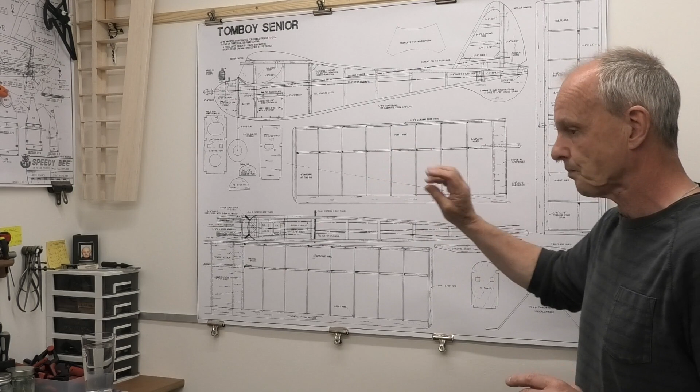Now these great set of plans by David Boddington were downloaded from the Outerzone website, and I said that they were published in Model Flying, and also along with that there was a great article by David Boddington outlining the build of this plane. It doesn't give you everything you need, but it gives you quite a lot of information that helps you through the process.

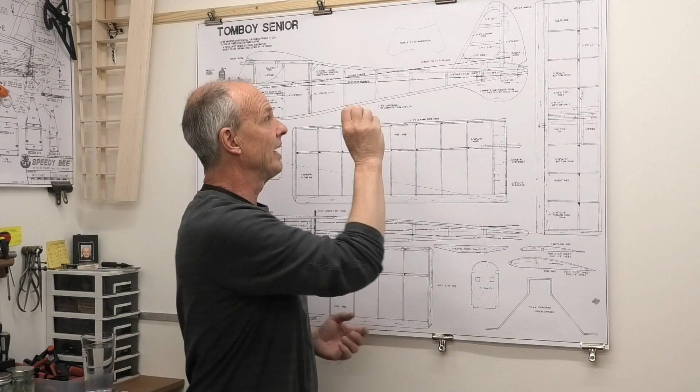And information like saying that actually this is quite a tail heavy plane, so you have to think very carefully about not making that tail even heavier during the construction, and actually thinking about how you're going to get weight up there in the nose. And that'll be important knowledge when we come to fit the radio gear. And what we'll do, as we've done with other builds, is just check before we put the radio gear in to see where that natural CG is, to make sure that if necessary, which is probably going to be the case, we need to put everything way up front.

Now I think one of the things I'm going to do first is build the wings and the tailplane, probably the rudder as well, and then I'll do the fuselage. I quite often build the fuselage first, but with this it just seems to lend itself to having the wings done first. And well, maybe you can build the fuselage first, but that's the order I'm going to do it in.

Now there's a few issues with the plans, or not issues, but things we need to be aware of, I suppose. Like the rib spacing and the wing length is a little bit out, so when we build the wings I will probably be setting it out just on a building board, not on top of the plans, because at the end of the day, if we've got the ribs and we've got all the trailing and leading edge and spars prepared, we can measure it and set it out. The plans don't really add a great deal.

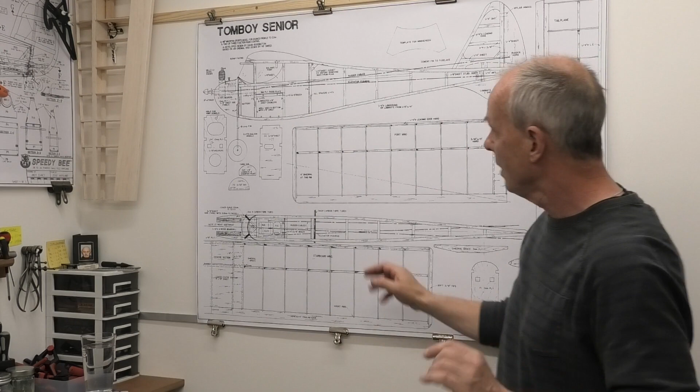The cross formers, hopefully you can see, I apologise if you can't, but the cross formers 1, 2, 3 are shown, so they've got the firewall and then these formers. It's worth noting though that there are 2 F4 formers, and actually this one here is really F2. It's just been labelled wrong.

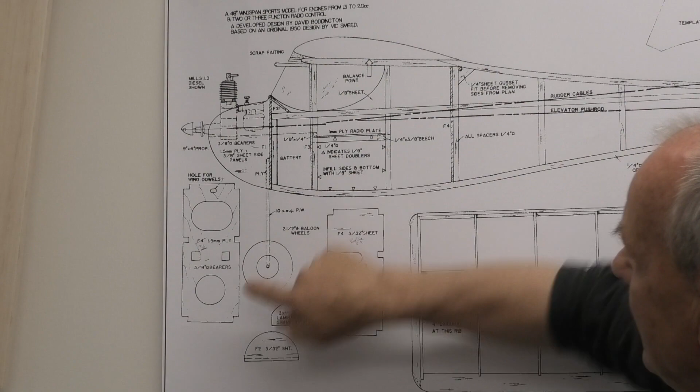At the front here you can see that the battery is indicated in this area. Now I'm not sure how you're going to get the battery into there, if that's what you need to do to get the CG right, because the former, which is actually F3 but labelled F4 here, only has these really small holes in it, and I don't think that's going to be big enough to get a battery into this space. So we need to be mindful of how we're going to do that.

We could put a hatch underneath. There's no reason why we can't, and if we need weight at the front, the added weight from building that hatch is going to benefit us really. So that's what we need to be mindful of as well.

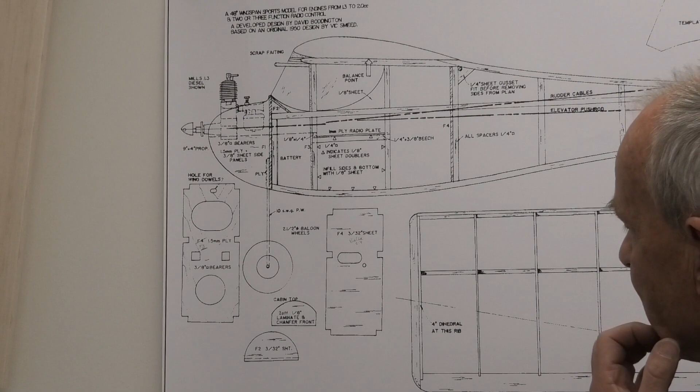Now if we look at the tail, we're going to need to think about how this rudder under here is secured, as well as the fin. The plans don't show any sheeting on the bottom side of the fuselage or the top, but clearly we're going to need to have something if we want to have those secure. So that's something that we'll need to deal with when we come to building this section.

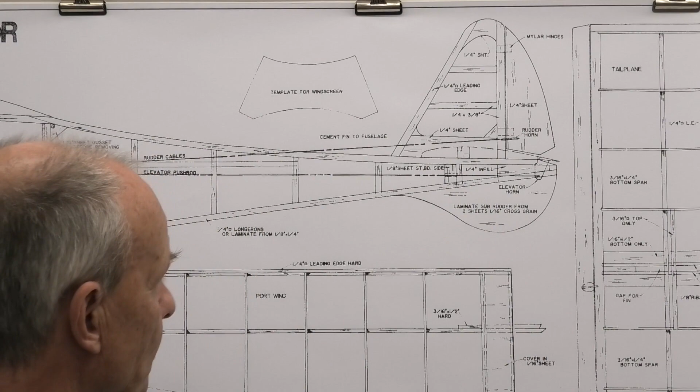Now, as with all plan builds, there's going to be lots of head scratching, lots of thinking, things we have to interpret ourselves, and the golden rule, as I always say, don't trust the plans, don't trust the measurements.

So when I build the fuselage, I'm going to be doing the two fuselage sides, one on top of the other, but I won't be doing any of these formers until I've got the fuselage finished, and then I will measure the fuselage and cut the formers to fit. If I cut these out now, build the fuselage, I might find that they don't actually go together very well.

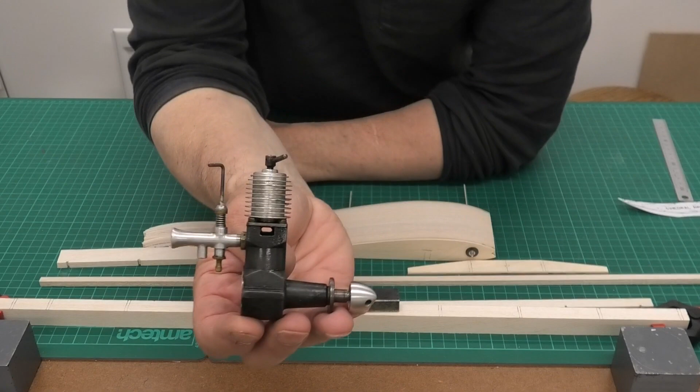Now, you can see there's some stuff on the bench here that I've already started working on, so we'll take a quick look at that now. Right, well, another chance to show you that lovely Mills engine, which is going to be great to get in this plane. I need to sort out a tank because I don't want to have a separate tank. Originally this would have had a tank at the back here, which has long since gone, but I'm going to get something or make something to do the job. But that'll be great, purring away. Lovely 70-year-old Mills engine.

Now, I've started to build the ribs, and as I showed you on the plans, there are two templates, one for the tail, the tailplane ribs, and another one for the wing ribs. Now I've stuck both of these templates onto 3mm plywood and cut them out. I then made a second identical template out of plywood, and so I've got the two, and I can sandwich between those pieces of balsa slightly bigger than the templates like these, and I can bolt them together. See, I've done it already with the wing ribs here, and then I can sand these.

I just get my sanding stick and I just make sure that they're all a perfectly smooth wing rib, and so I think there are 20 wing ribs in here, and I've cut out the bird mouth at the front to take this 1/4 inch piece of balsa. Now I've also put in the cuts for the spar. There's a single spar on the bottom, and that is, let me just look at the plans because I can't remember, it's 3/16 by 1/2 inch balsa, and I have already prepared that, I think.